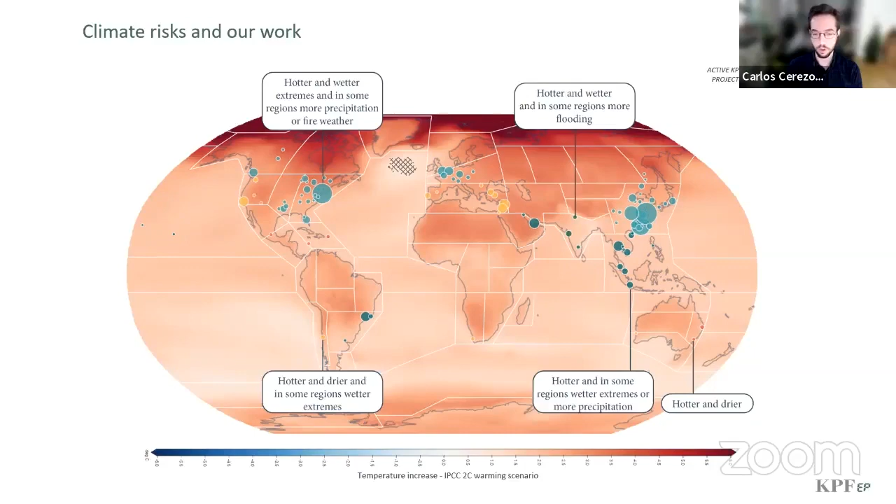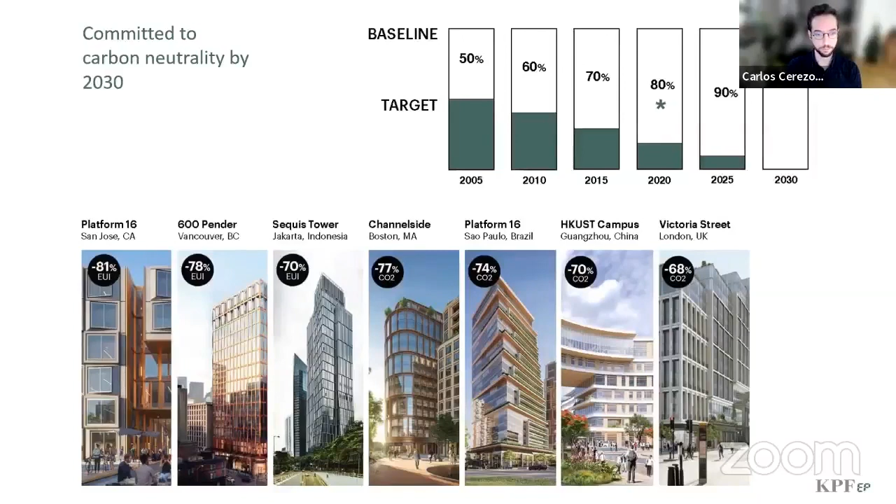That forces us to think carefully about how we design our projects, not only from a perspective of reducing carbon emissions—we are, as a company, committed to the AIA 2030 target and to finding ways to design carbon neutral buildings by the end of this decade—but also to look at projects through a lens that considers how we reduce emissions in materials, buildings, and transportation, how we design for a decarbonized world, and very much how we design for this uncertain climate, for places like the site I'm going to be talking about, where this was a priority from the beginning.

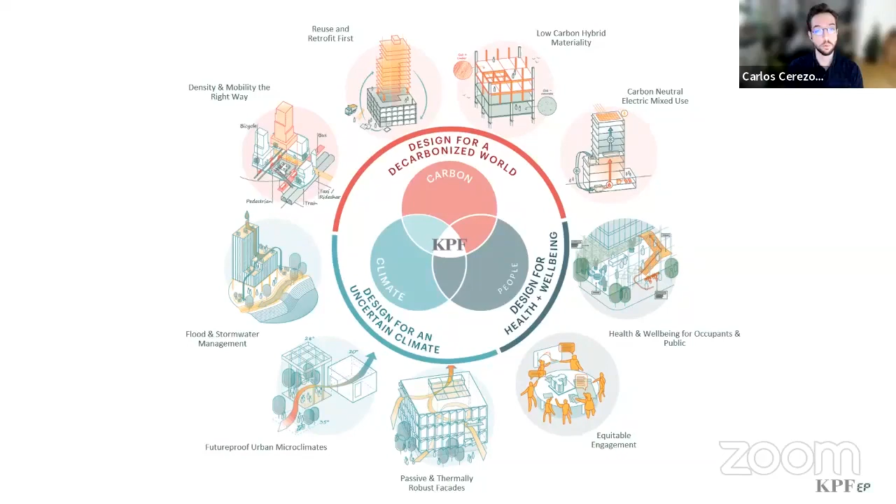So moving into the project: what did this mean for HKUST? When we were approached to design the campus, to plan and design it in 2019, it was a very interesting project from the beginning, given where it is and its relationship with the main HKUST campus in Hong Kong in Clear Water Bay. We were tasked to design this sister school.

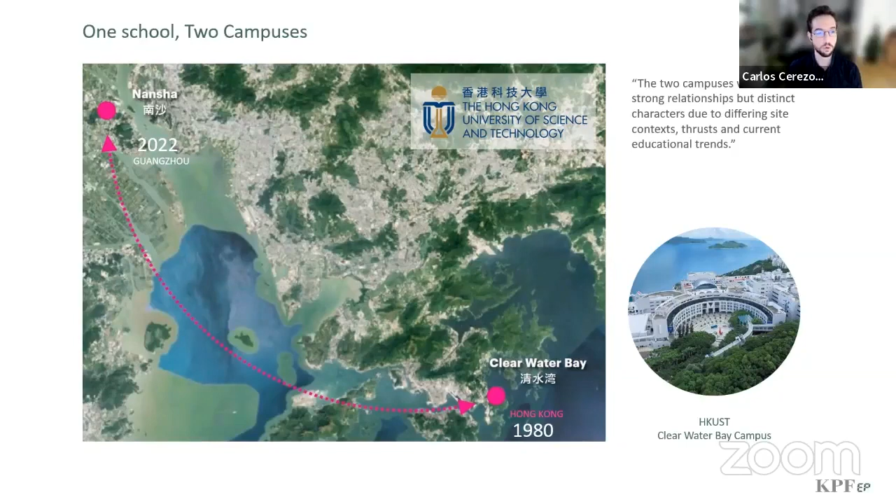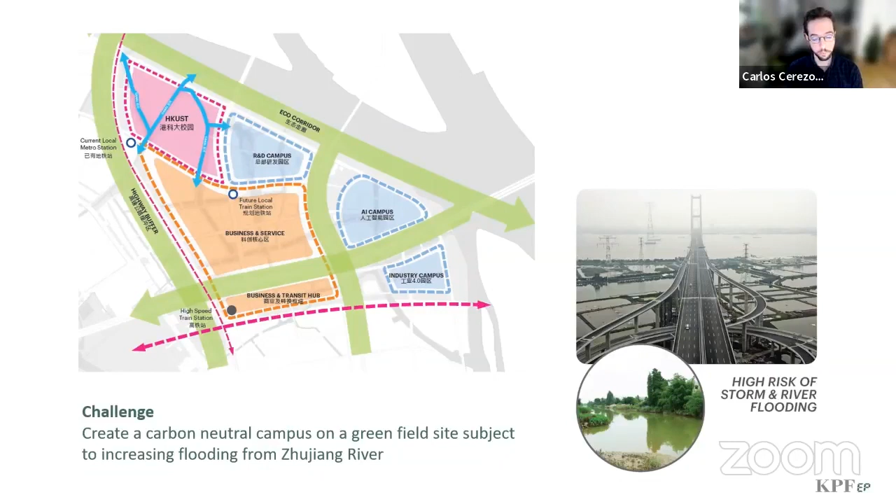What from an academic perspective seems like a relatively simple proposition—just a program expansion of types of research and so on—when you come to the site, you realize it's a much larger challenge. The site of the new project, shown in pink to the upper left, is by the river in the Nansha area, a site that already floods every year with certain regularity, which is only going to get worse in an area that is very hot, very humid, without much wind most of the time. HKUST tasked us to design effectively a carbon neutral, or carbon neutral-ready, campus. With that mandate, we started the project.

We worked very closely with the university to identify the principles and main ideas that would drive the design. In addition to the carbon neutrality goal—designing a campus that could be carbon neutral before 2060, the national China goal—there were two other big ideas. One: it had to be a campus that can really adapt and become as future-proof as possible. That drove a lot of the decision-making in design, because the university asked us, rather than put the newest technology in every building or mechanical system, to put in the necessary infrastructure so the campus was never limited in its capacity to improve. That's one big idea—long-term thinking.

The other big idea is this idea of a living lab campus. This came up at the beginning—Faye brought it up, Mr. Lee brought it up as well—how the architecture and systems can support the education and enrichment of those using and learning on the campus.

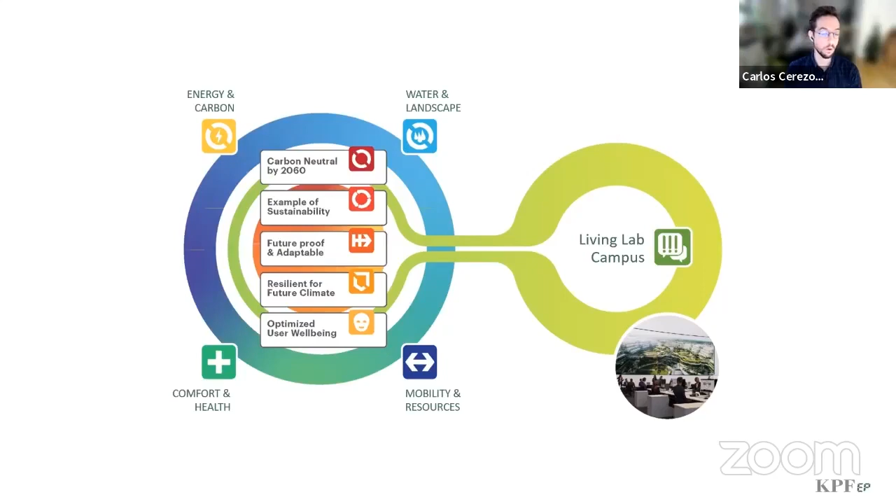Just to give you an overview of the project itself, this is phase one of the campus, which we just completed. It's a very large site, of which we've so far occupied maybe less than half, surrounded by canals, including a mix of intense graduate research for both engineering and sciences, and a huge mix of users. This is truly a small city—we're talking about 40 buildings, 10,000 students—so really a very significant urban community.

As we approach the site and try to marry this very complex natural environment with the purpose of the university, the master plan is largely driven by the idea of a central hub, where most of the research and educational activities are concentrated. The rest of the campus is planned radially around it, because one of the main objectives is to allow the campus to grow and change and improve, so it was possible to grow both east and west without necessarily having to build a new center.

Other uses are structured around it with the idea of embracing the local nature and leaving as much of the campus empty as possible. Since the beginning, we decided not to build the whole thing, but rather to give as much as possible back to the local wetlands and natural systems, to some degree mitigating the flooding.

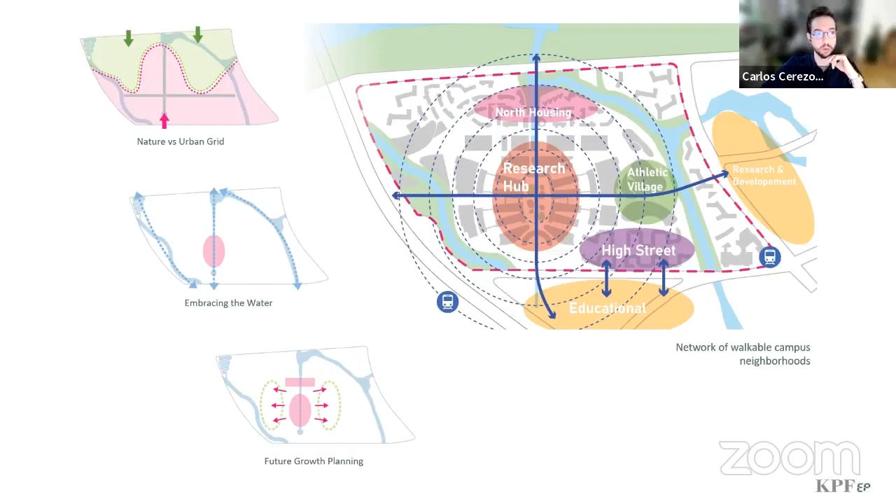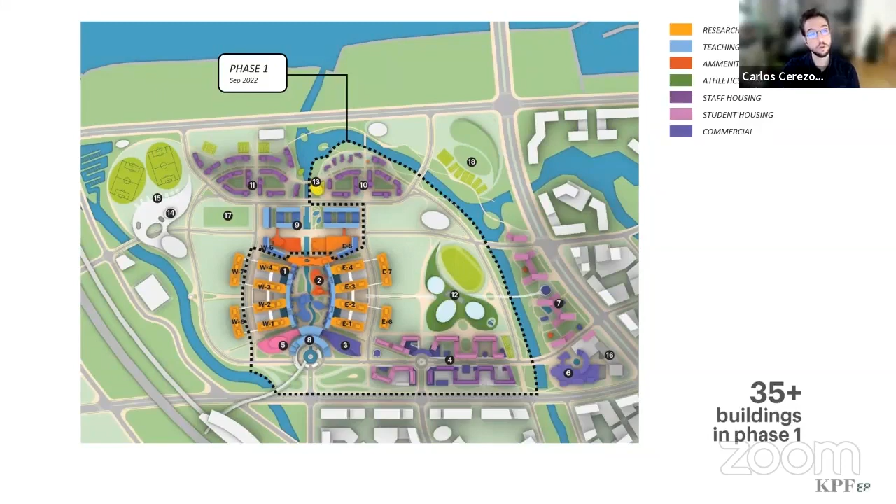Focusing a little more on that central hub, which I think is probably the most unique and critical space of the project, this whole cluster of buildings is designed as a very large mega structure that overlaps architecture and nature, thought through to encourage collaboration. You have long corridors to the sides, which we call the concourses, that include collaboration spaces, faculty offices, and maker spaces, with a lot of opportunities to go outside into naturally ventilated spaces. There's also a continuous loop running throughout the courtyard that allows students and visitors to walk comfortably from any research lab to any other research lab in less than 5 minutes.

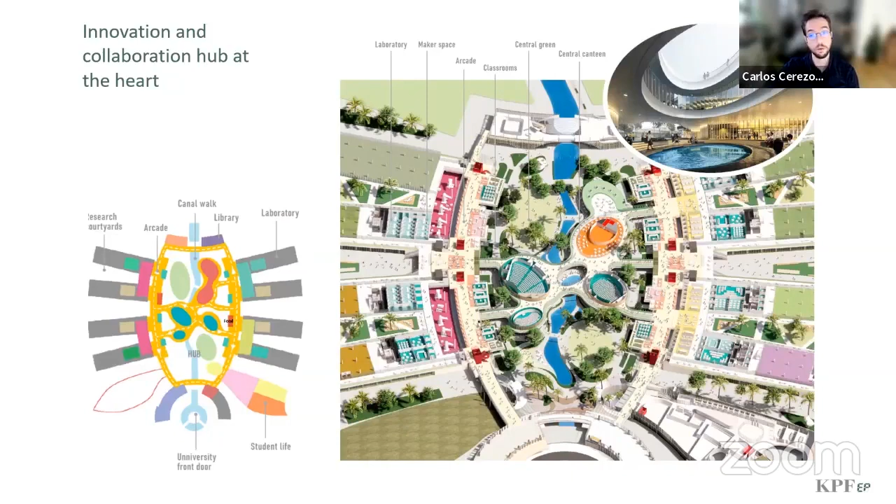Now, probably one of the most interesting aspects of the project, and something that drove a lot of what was possible in terms of sustainability and planning, is the speed. From our perspective in the US, it's an incredibly fast project. From the beginning, the first workshops working closely with HKUST to define the goals of the project, to the moment we finished construction documentation for all of those buildings, was only 18 months. And then that kick-started a construction process that also went very fast.

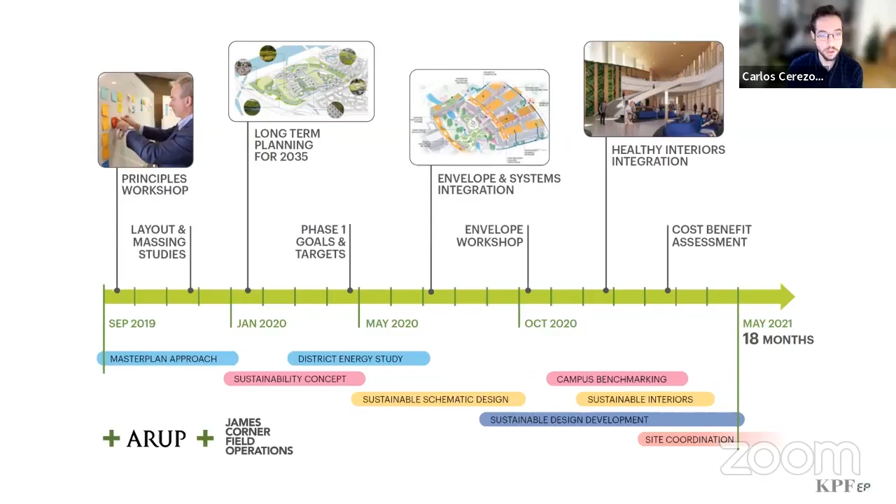To achieve all the goals of the project, we had to work incredibly closely with the university, our partners and consultants, to a degree I personally haven't had on any other project—almost daily meetings at night from the US with our Hong Kong office, meetings in which Faye has been involved more than once—resulting in a project that captured most of what we wanted. If you go to the next slide.

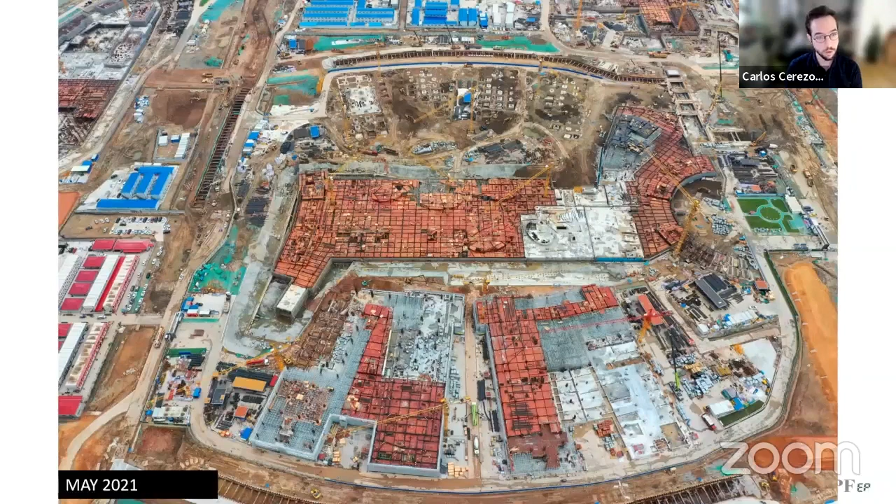And then you've seen it in the previous image, finished as of last week. So we're talking about 3 years from the first idea on paper to the campus being open and in operation—it's been an incredible journey. Now I want to take the 3 big ideas I mentioned at the beginning that drove the sustainability story, and talk about how those were integrated into the design and how we made it work.

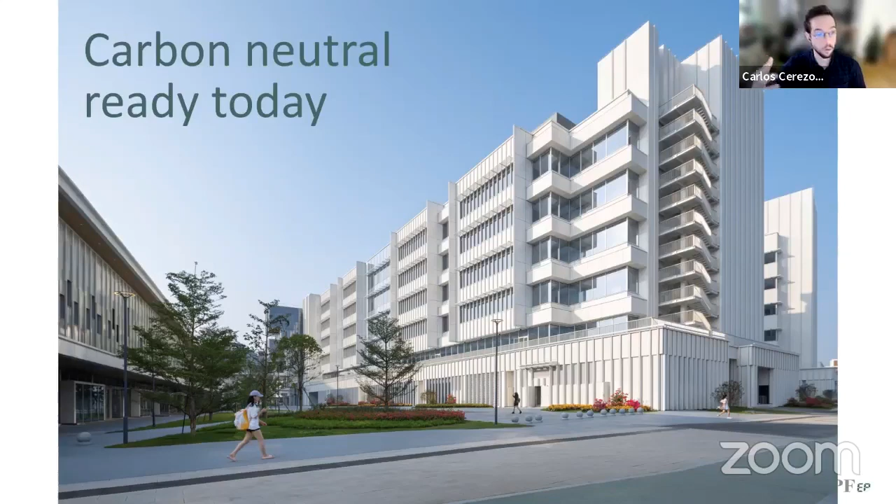The first point is this idea of carbon neutrality. The goal for the campus isn't to be carbon neutral day one, but to be ready for 2060. This is a multi-step process that starts by designing the buildings very carefully, focusing on passive design, then capturing energy where possible between and within buildings, and introducing renewables.

The whole campus is designed so that it could accommodate a utility scale, very large solar PV canopy that covers about 10% of the campus energy, providing a lot of opportunities for metering and improvement. All of those things together with the improvement in the grid in the region predicted or planned for the future should be able to bring the campus to being fully carbon neutral without having to resort to offsets, if the university doesn't want to.

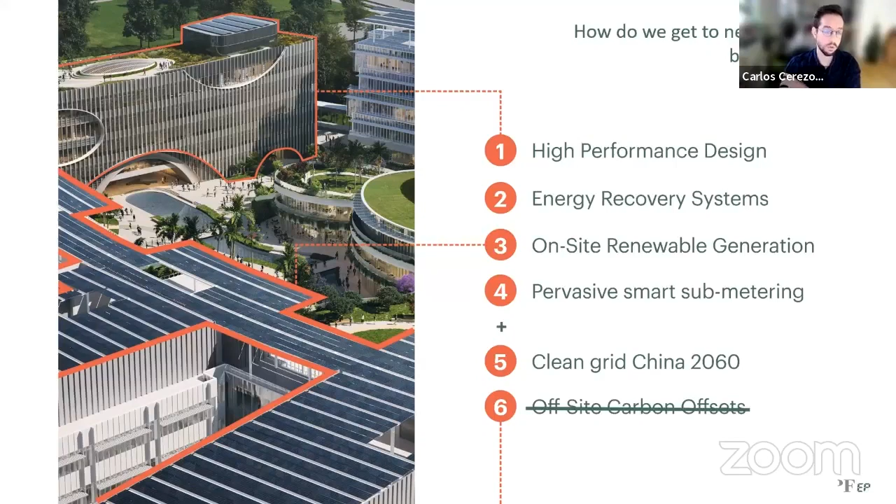For example, some aspects of the design supporting these ideas: if you look at the layout of the campus, it's all very carefully laid out so that the main buildings are always facing south or north, west orientations, which are the most problematic, or southwest orientations, are for the most part avoided. And the main public spaces are all open and analyzed through wind simulation to make sure that we get breezes through and can keep them comfortable.

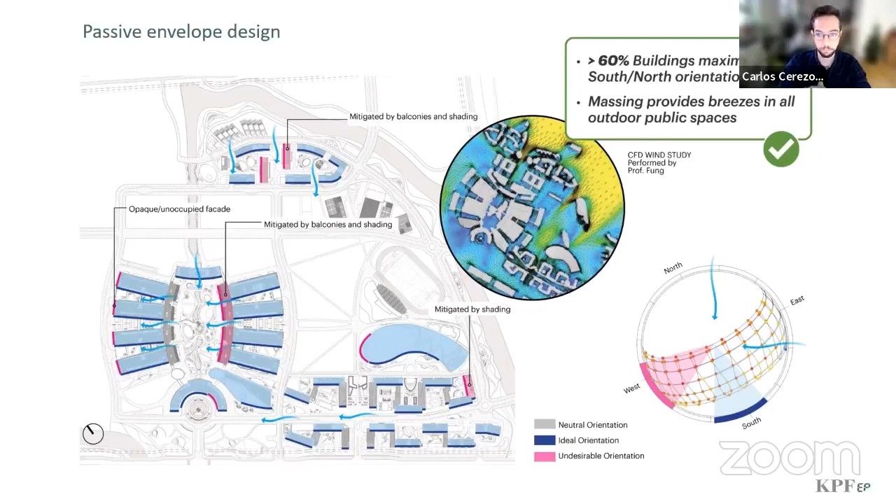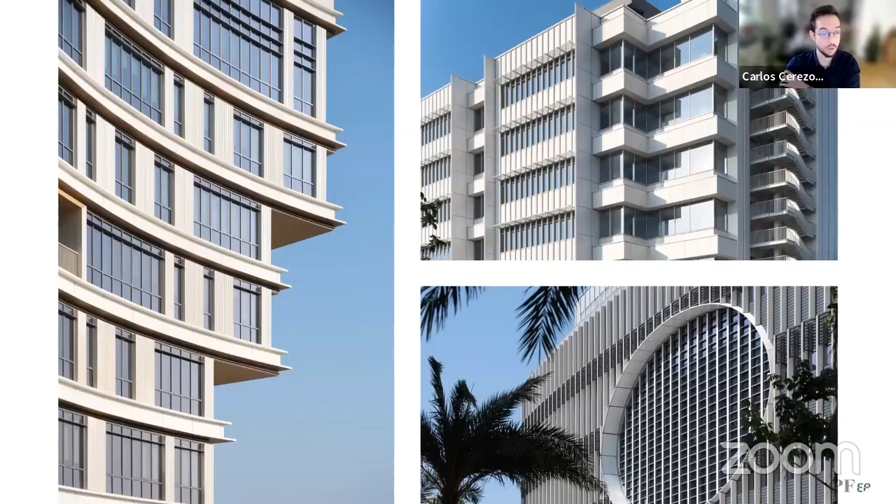Then this idea translates into the buildings. There's a huge diversity of textures and facade finish approaches, but the idea in all of them was to bring the amount of glass down, to introduce shading in different forms, and to make sure that we could keep very transparent buildings to bring a lot of daylight inside, while making sure the peak cooling loads were manageable and the buildings could achieve the energy efficiency we were looking for.

In some of them, and this has been mentioned before in some of the other presentations, it's really interesting to see how far you can take naturally ventilated spaces in even these very hot and humid climates. So we very carefully analyzed the program of the campus and identified a number of spaces that could, at lower internal loads, be naturally ventilated and engage directly with the outside.

An example is this: the library central atrium, which is at the top and provides cooling for about half of the year, not to the main book stacks, but to all of the student study spaces and collaboration spaces in the bottom of the building.

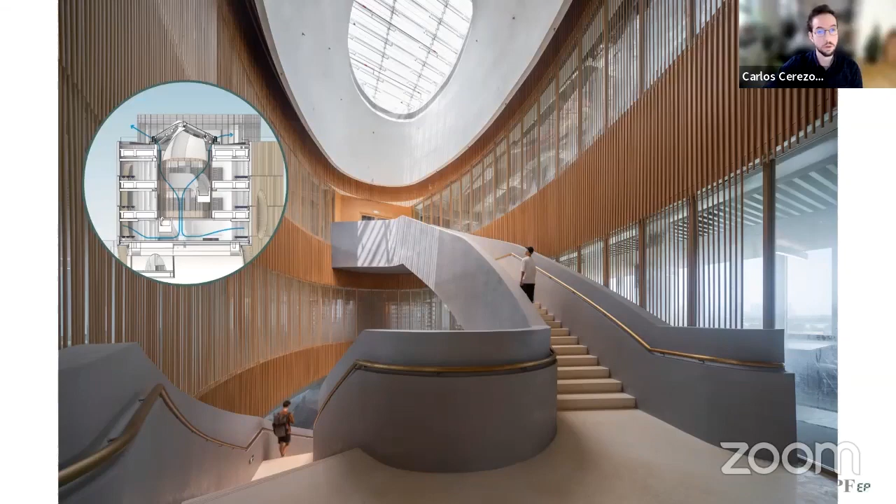We're designing the buildings and thinking about their specific systems and requirements and the architecture itself. One of the most interesting aspects of this project is because we're designing a small city, we have an incredible diversity of use of resources and conditions. Some buildings need a lot of hot water, others need a lot of cold water. Some buildings produce a lot of organic waste, others produce a lot of dirty water. So since the beginning, there was this circular idea of finding any possible waste source in the campus, then making sure that it's reused somewhere.

We ended up building this very complex system that you see here in the diagram, where there are a lot of these closed loops. Wastewater is used for irrigation, something relatively typical in these campuses, but then some of it is also used for biomass fuel production. The data center is connected to the larger energy system. So the result of all of that is that there's a very significant reduction of resources across the board.

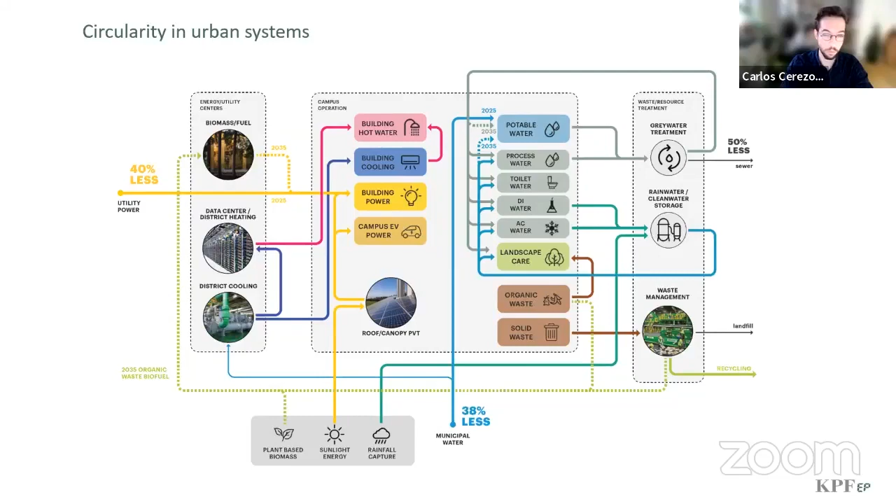When you look at the systems on campus, I think probably the most interesting and unique of those solutions is our district cooling system, which is not only fully electric and already increases efficiency across the campus, but has two special characteristics. One is that we don't have one energy center only - we have one big energy center, the blue building you see at the top, and then individual chiller plants only in the lab buildings, so that when the temperatures are nice and you don't really need cooling anywhere except the labs, you can turn off everything else.

The second big idea is that there's a big data center designed to work with the energy centers right next to it in red, because all of the heat exhausted or required to eliminate from the data center cooling and the district center cooling is captured and reused for hot water production on campus. So effectively, over 95% of all the hot water consumed on campus comes for free and is produced in that data center, also saving water we don't need to use for evaporative cooling.

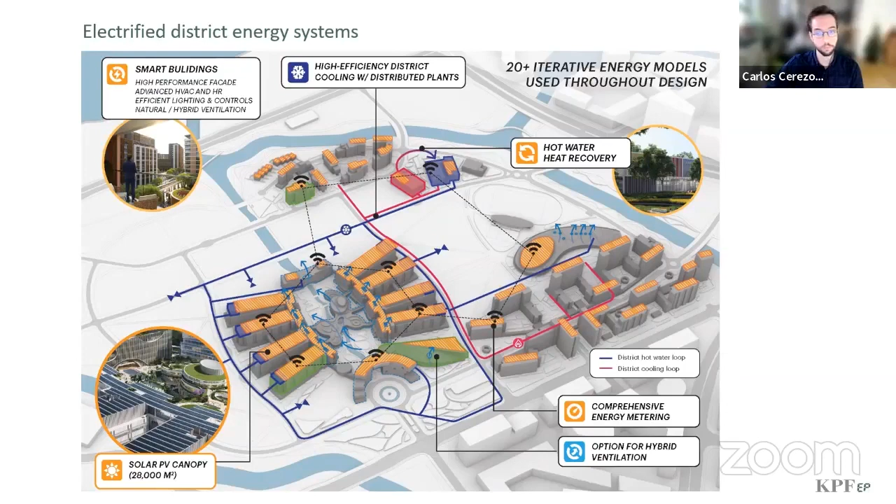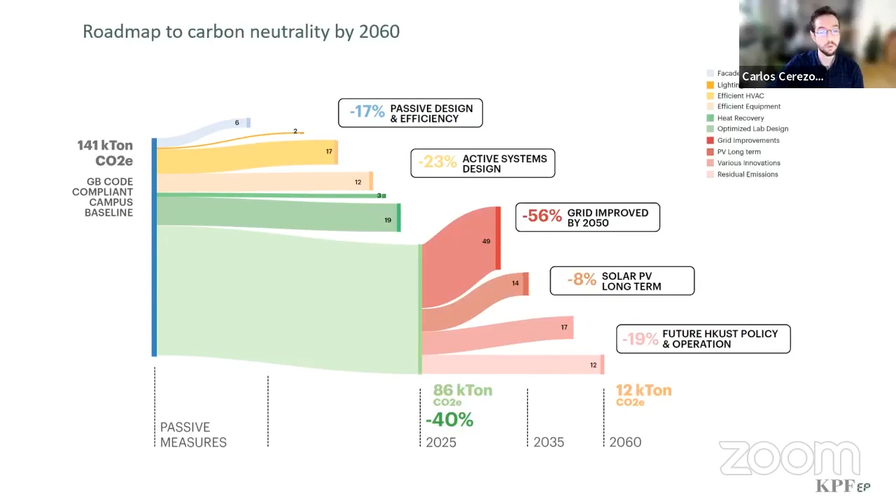The second big topic I mentioned at the beginning: it's not only about a long-term approach to carbon reduction, but a long-term approach to keeping the campus safe and making sure it's able to endure all the changes and uncertainties that might come with its site and climate.

Water is critical in these sites. We knew there were going to be flooding issues. In fact, we had to develop a hydrology model for the site that went further than what Nansha had available, which had only planning for what would happen to these canals in a 100-year storm. We needed to look at a 200-year storm under climate change conditions.

After all of these analyses, we realized there were really two options: one was to accept the flooding, and the other was to raise the whole site 3, 4, or 5 meters of soil, which would be an incredibly unsustainable way of addressing a site like this.

And the rest of the spaces in the campus are designed in a gradient—some of them will flood sometimes, and it's okay, while others never have any water.

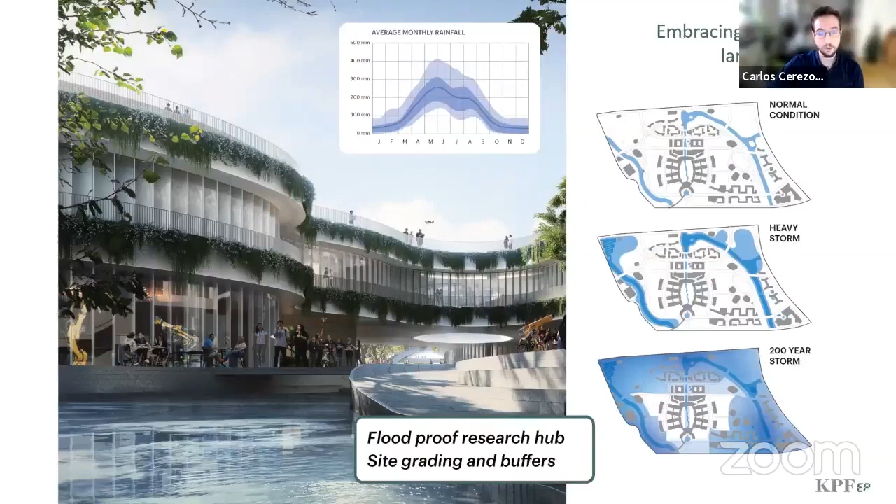That influenced the larger resilience strategy that starts with that overall planning condition of the terrain, but also goes to smaller questions. We have this whole network of bioswales and rain gardens, shown there in green, that retain the majority of rainwater. Emergency power is very carefully studied in different areas so that if something happens, different parts of the campus can operate independently.

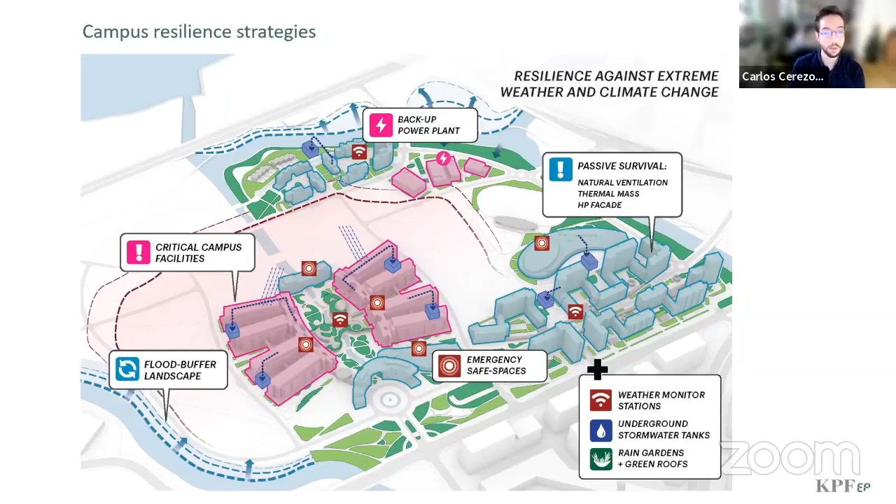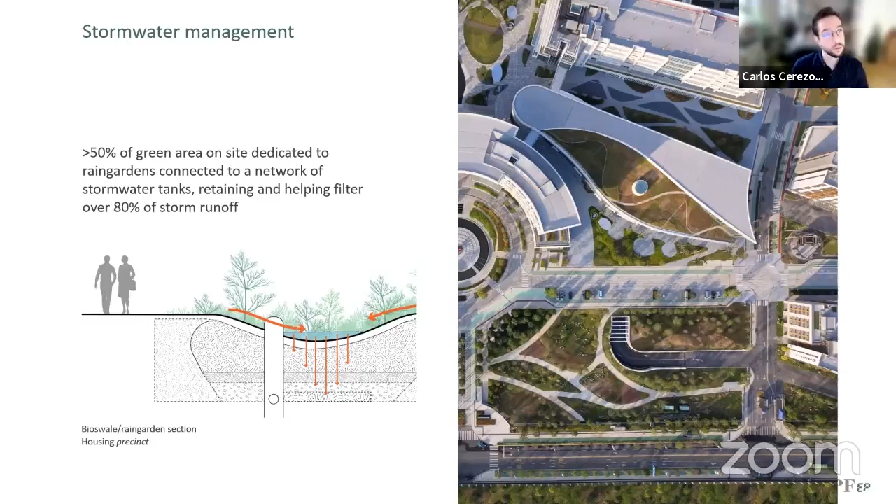Just to give you a sense of how these bioswales and rain gardens work and look, you can see in the picture an aerial of the entry area of the campus where all of these gardens are already in place, and water comes into the campus so that if there's an excess, it can be managed.

The second aspect of resilience and adaptation has to do with climate. We did a lot of studies of effective temperatures, and it became clear very quickly that it's not only about shading and ventilation, but we needed to really understand microclimates and how things like ceiling fans and outdoor cooling might help keep critical parts of the campus always comfortable, because we want people to go outside, collaborate, and bike around, even in the summer.

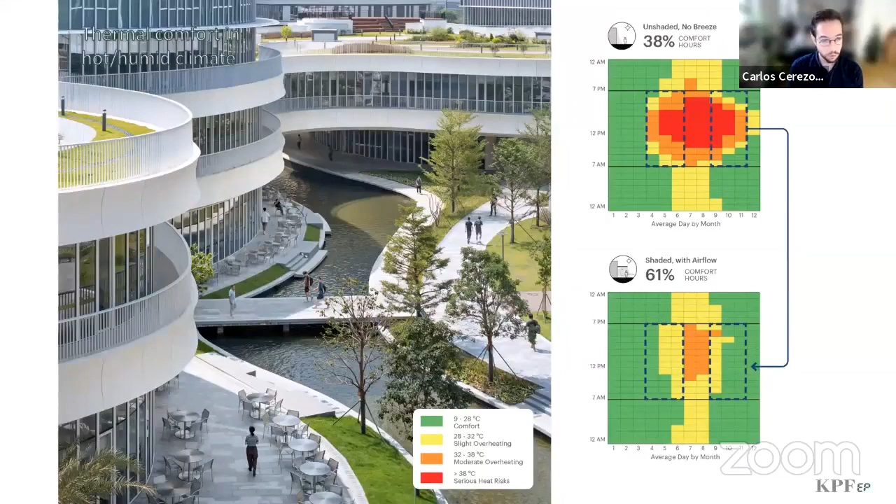Throughout the design process, there were a lot of studies like these, carefully understanding what the temperatures would be in different spaces, and then how to make sure that the network of key pedestrian connections, highlighted there, would stay comfortable and shaded whatever happens. That drove the planting, the selection of tree species, and the architecture.

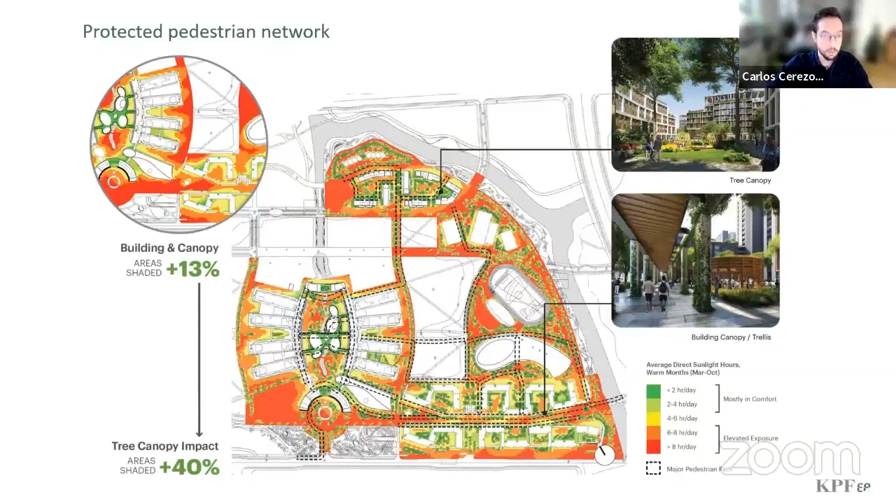So we can confidently say that somebody can walk from one corner of the campus to the other, always shaded, and stay relatively comfortable, even in a very, very bad heat wave.

This is the central courtyard, probably one of the most interesting aspects of this design. You can walk below those ovals and around the canal and be always protected, always covered, and always with breeze.

Just to finish, going back to this idea of the living lab: how the university, HKUST, really wanted data and research to not only be available for researchers, but to really allow the campus to be an ongoing experiment, a campus that is always improving.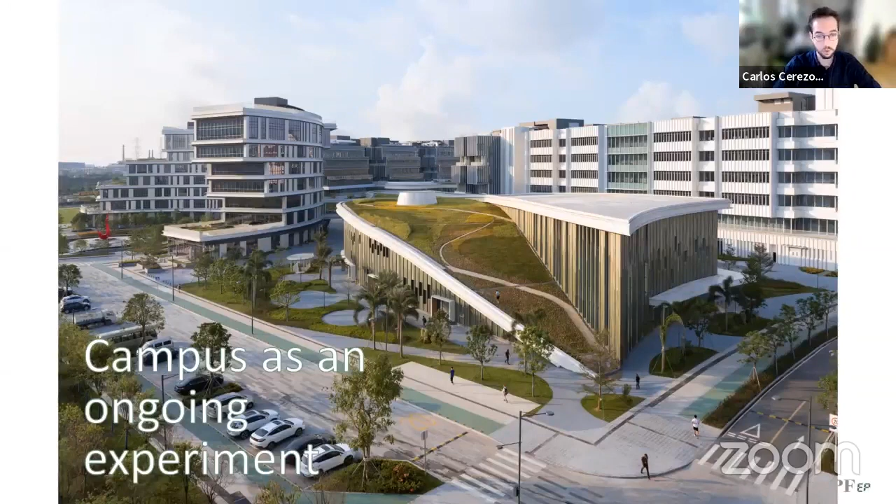One big idea was that everything needs to be measured. We worked with Arup on a concept for the campus where temperature, electricity consumption, and water consumption are measured almost at the scale of every room across the board.

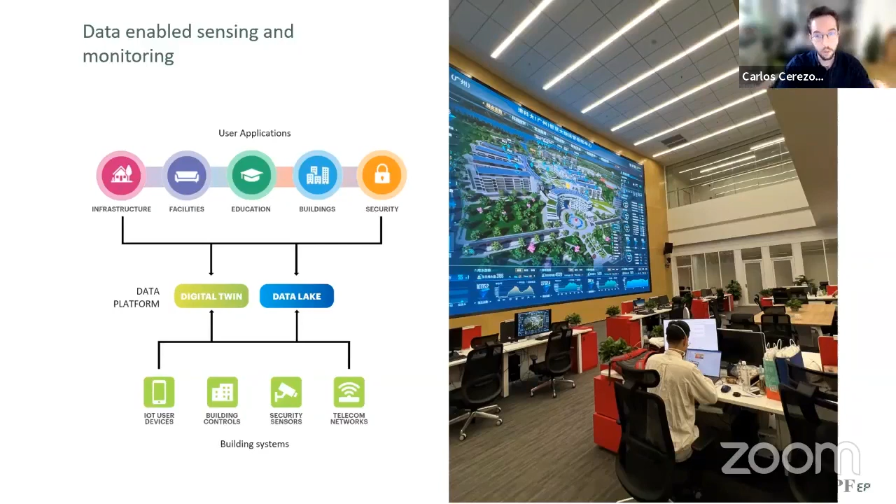It's centralized, it's made available to students and faculties, and can be visualized in this very large double-height campus brain. That infrastructure supports a number of spaces in the campus design, specifically research facilities.

We have residential buildings that have a water lab in the basement available for researchers. Our energy center has research areas as well, so people can understand what's happening with the energy systems on campus. There's an AV and electric vehicle lab connected to the loop across the campus, and there are water quality sensors in the canals.

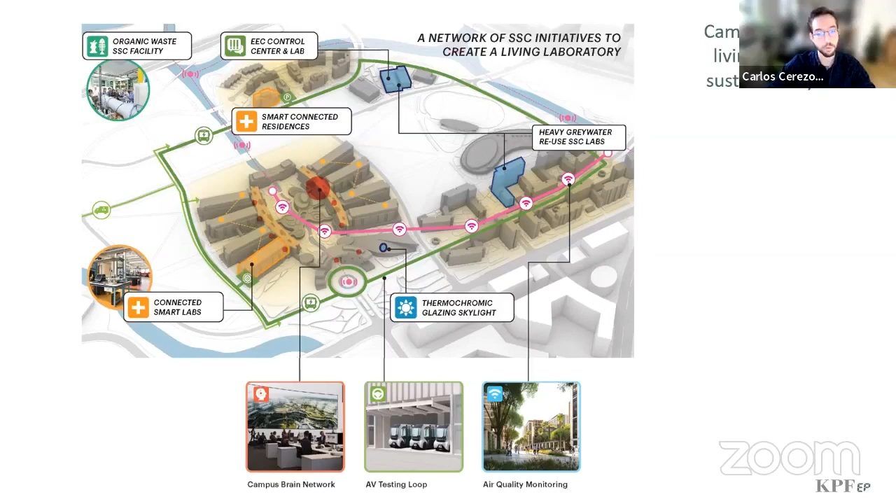So there is a lot of infrastructure from day one, so that the university can use it to make sure the campus is better every year, and that in 5 and 20 years the campus is only getting better and closer to its goals.

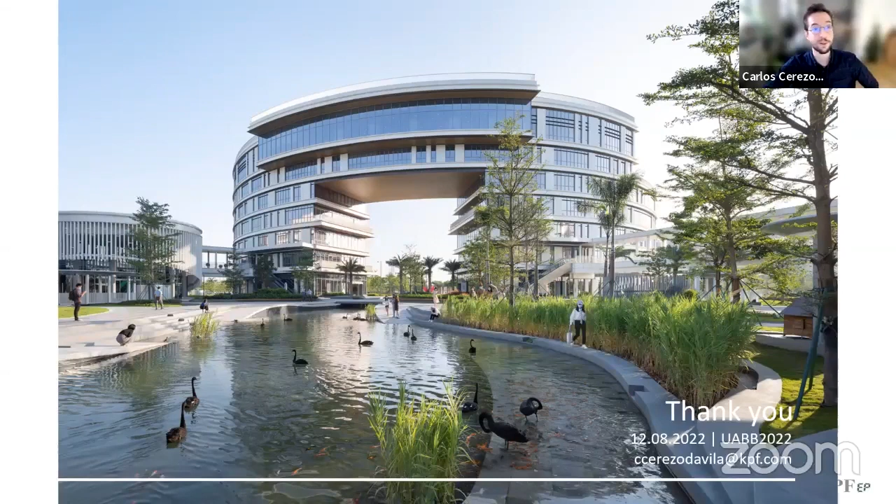And next, I'm going to finish. I hope that you have a chance to visit it. You're closer to it than I am, and that you enjoy it. Thank you.